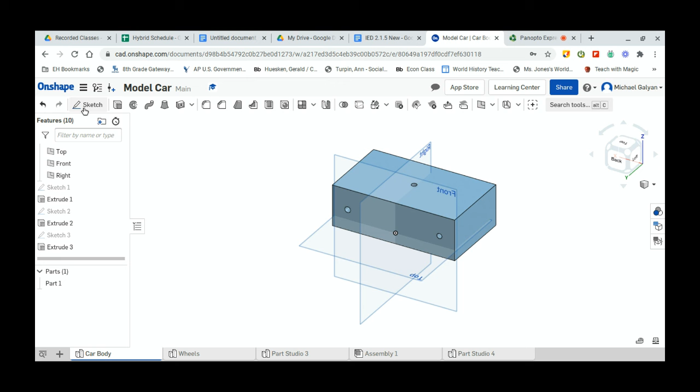So let's go ahead and make a sketch on the back of the car. We'll turn it so that we can see it there. And then you're just going to put a small square just right up here. Don't worry about dimensioning it. Don't worry about the placement of it or anything like that. Now click dimension.

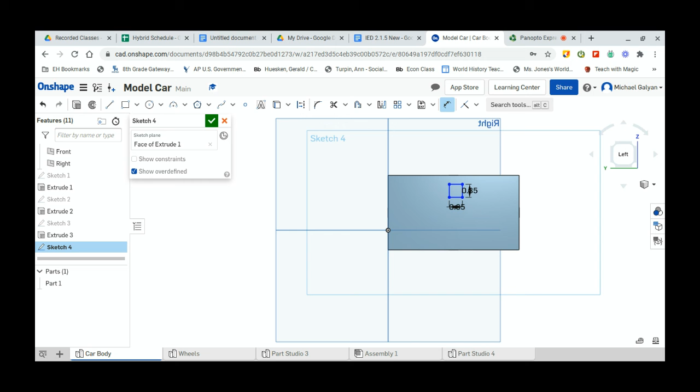We want the square to be 0.35 inches on each side. So 0.35 wide, 0.35 tall. And then the location. We want it to be right smack dab in the middle. So based on what we know where this thing is, we want our location. We want this to be 0.825 inches off the bottom.

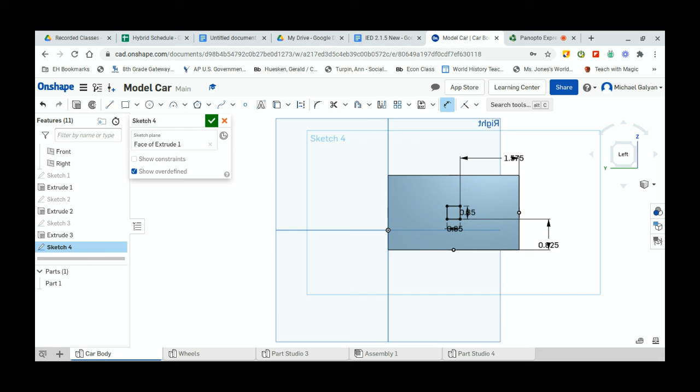And we want it to be 1.575 inches from the side. And you can go through and finagle, or you can go through and double check, but those should be our two numbers. So 0.825 inches from the bottom or the top, either one will work, and 1.575 inches from one side to the other side. That should square it up right in the middle.

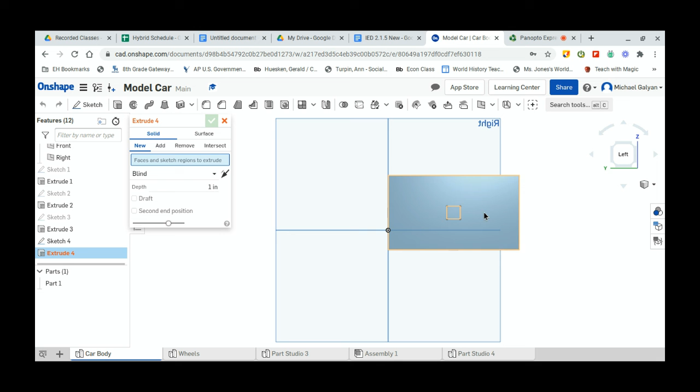Now, we have our square right in the middle of our drawing. What we're going to do is we're going to extrude it. And to keep our dimensions the same, we're going to extrude it 0.35 inches. So what we want to do, we want to click on remove. We want to remove some material. We want to click on our square, and we want to change that to 0.35 inches.

And then we can hit our check mark, and then we can see that as we rotate it, it cut that hole in there. All right, so again, 0.35 inches is the size of it. So that square is 0.35 inches wide, 0.35 inches tall, and 0.35 inches deep.

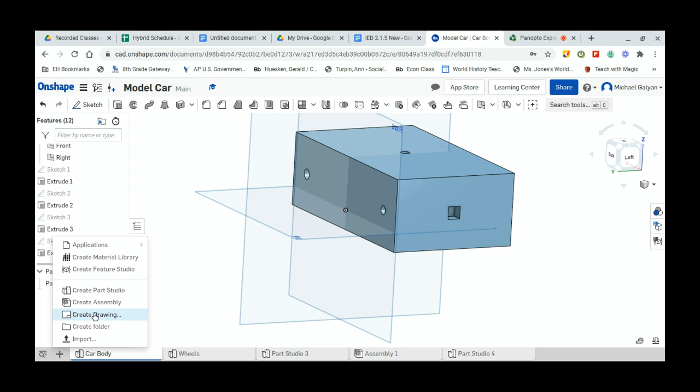Now, we're going to make our actual hitch. So we're going to click down here in the bottom left corner, the plus sign. We're going to create a new part studio. And we're going to name it Hitch. Oops, it's right here. We're going to rename Hitch.

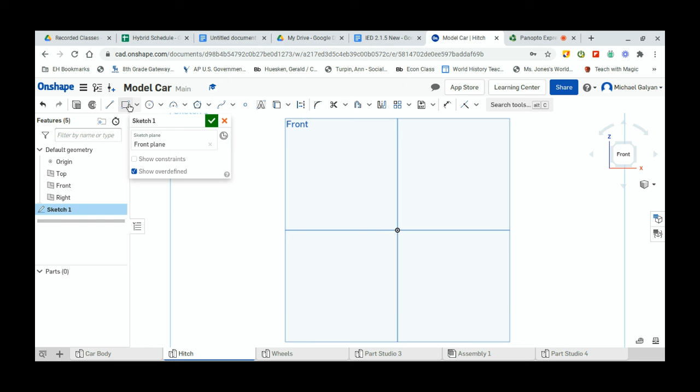All right, now to make this, we're going to make a sketch here on the front. And as you can guess, we're going to make a 0.35 by 0.35 shape. So 0.35 inches wide, 0.35 inches tall. Okay, now we have a square that size. And we're going to hit our check mark.

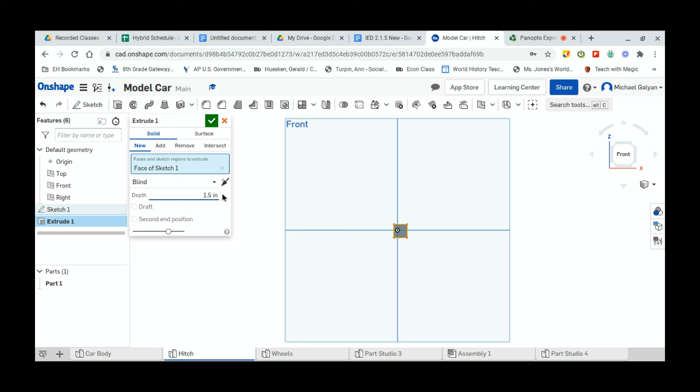Now what we're going to do is we're going to extrude that square. You're going to extrude it, I would say here, for the best results, 1.5 inches. I had some people that had this class earlier. I think they only did 1 inch. 1 inch will be fine, but for the sake of this video, do 1.5 inches. And all you have to do is hit the check mark, and now we've got this shape.

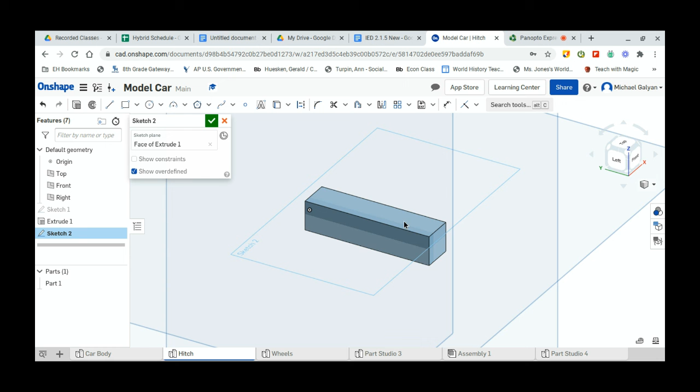All right, so then what we're going to do is we're going to put a hole in it, because you know a hitch, you're going to have a hole. Think of like the receiver on a tractor, right, that a hitch pin is going to drop down in. So let's zoom in a little bit. We're going to put a sketch on the top of this. Now let's rotate it so we're looking at the top.

And then for sketch 2, we're going to draw a circle here. And we're going to put it just about as close to the end as we can. And we're going to make that circle 0.25 inches. So 0.25 inches, 1/4 of an inch. And then I'm going to dimension that circle so that it's in the center left to right of this thing. So we're going to click from the center point of the circle to the edge, and that should be 0.175 inches.

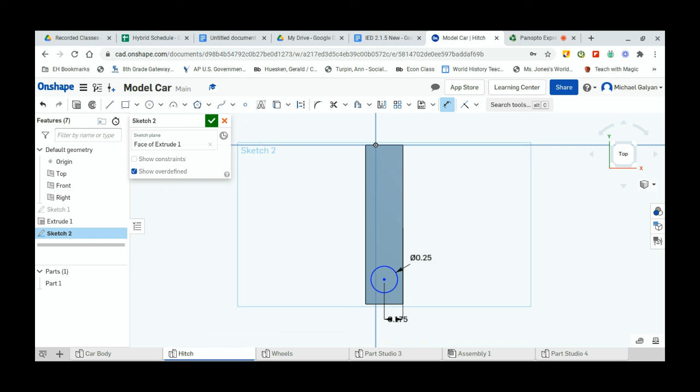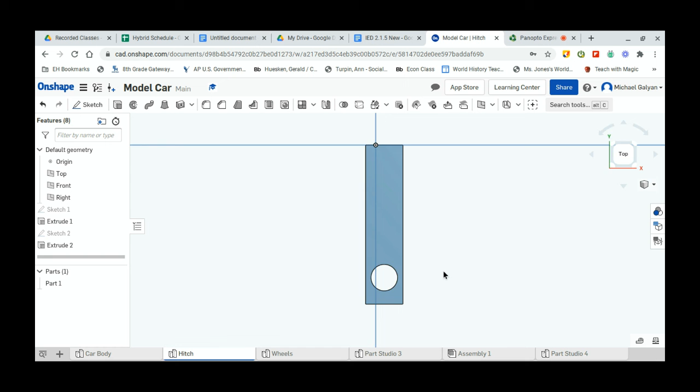And that centers it up. And then from the end, we want that to be about 0.25 inches from the end. Should make that nice and even there. All right. Now, last thing we're going to do, well, we have two things. We're going to extrude that hole. So again, hit extrude, hit remove, click on the circle, hit our check mark, and you can see it cut a hole all the way through that.

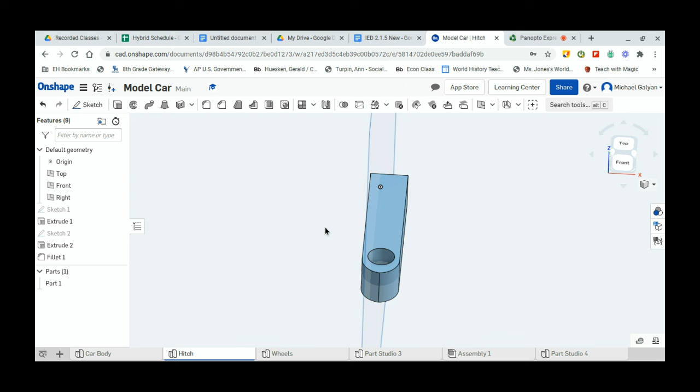Now the last thing we're going to do, we're going to use our fillet tool, and we are going to fillet, curve it around a little bit more. We're going to fillet these edges and just click on whatever standard. 0.2 is the standard radius, and then hit the check mark, and we wind up with this nice hitch like this.

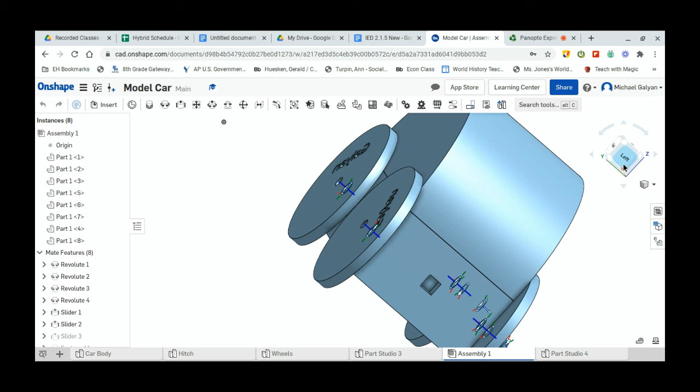Okay. Now, we can go in to our assembly, and we notice that our car now has a hole right here. Okay, our car has that hole. What we're going to do is we're now going to place that hitch in the hole. So we're going to click on Insert. We're going to click on Hitch. And we're going to hit the check mark.

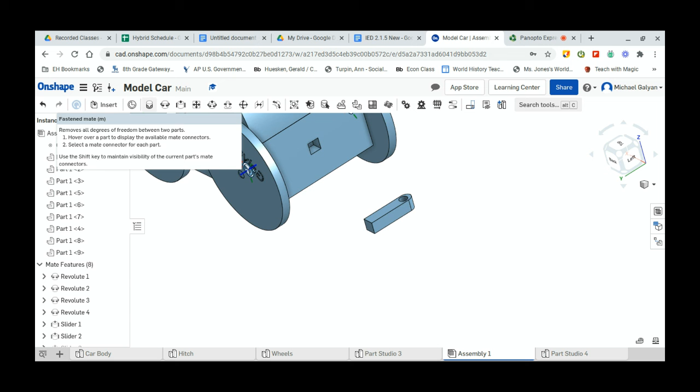And then to put the hitch in there, we're going to use the following. Up here at the top, you see the Fastened Mate. We're going to click on that. We're going to zoom in here. We're going to click on that bottom surface, so you can see what I've got highlighted there. You're going to click on that. And then we're going to zoom in on here.

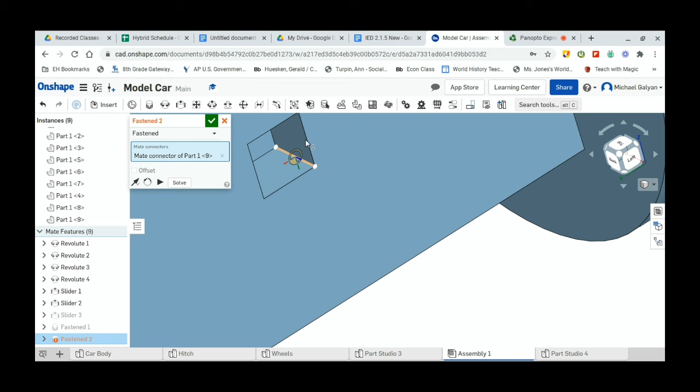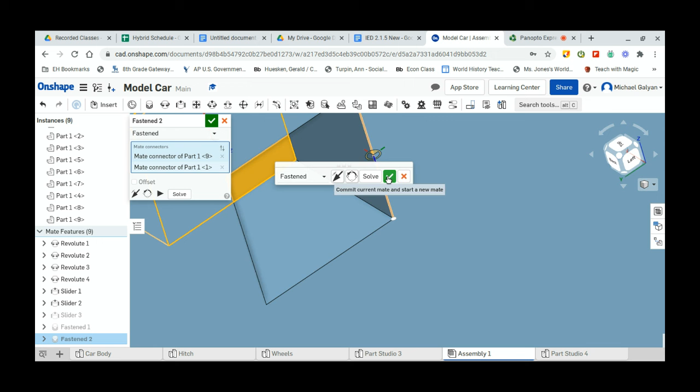And you're going to click, and the first time you do it, it's going to try to put it on the outside. You've got to really make sure you get in here and put it on, if I can get this thing rotated. So see, when I first try to do it, it's going to be on the outside of it. It's not going to look right. I want to click on this back wall and click on that. And now, let me zoom out here, sorry. You see how it mated that to the back wall? It's in the wrong spot, so I just flip it like this.

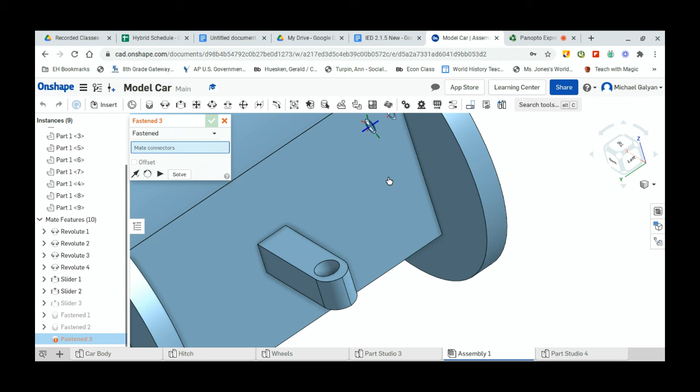Okay? Now notice how my hole is sideways. I want my hole up and down, so I can hit this secondary axis button, and it's going to put my hitch in just like that. And now my hitch is locked in. If I grab it and try to move it, I can't. It's locked into the car, and that hitch is now permanently in there.

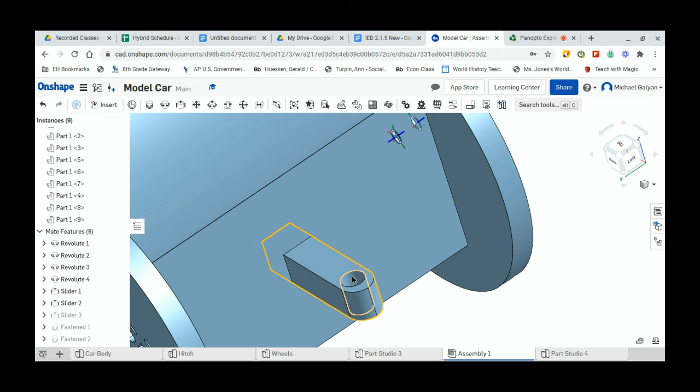Now, what you're going to do for the other side, when you make the trailer, you're going to make that exact same hitch, but instead of, when I made this circle to extrude it and make a hole, you can actually extrude it and make a peg. And it's going to be that same 0.25 inches. So instead of extruding it and removing and cutting a hole, you're going to extrude and make a peg.

So if you want to see what I'm talking about, I'll show you in this hitch. If we go to this extrude 2 here, if you were to hit add, you would wind up with this. And so now, the hitch that goes on your trailer is going to be this. The hitch that goes on your car is going to be one with the hole, and you'll just drop that hitch pin down in the hole when you put them together.

Now, that may be easier said than done. So if it doesn't fit together perfect when you go to make them, we're not going to worry about it too terribly much. We know that they would go together, so don't worry. Don't sit there and spend a half an hour trying to get it all to work just perfect every time. But that's how you make the hitch. So for those of you guys working on it today, this is embedded in the 2.1.5, so you guys can check it out there.